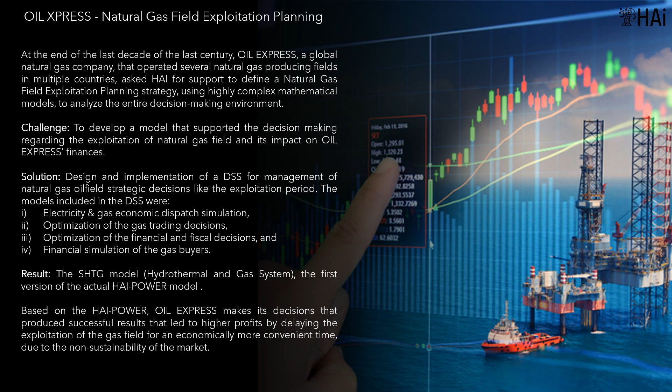Solution: design and implementation of a DSS for management of natural gas oil field strategic decisions, like the exploitation period.

The models included in the DSS were electricity and gas economic dispatch simulation, optimization of the gas trading decisions, optimization of the financial and fiscal decisions, and financial simulation of the gas buyers.

Result: the SHTG model, hydrothermal and gas system, the first version of the actual HAI-POWER model.

Based on the HAI-POWER, OIL EXPRESS makes its decisions that produced successful results, leading to higher profits by delaying the exploitation of the gas field for an economically more convenient time, due to the non-sustainability of the market.

HAI-POWER integrates the following models. HI Electricity Supply Chain Optimization supports decisions in the electricity supply chain, in terms of sectoral planning and business generation.

HI Smart Grids Optimization supports the decisions of the various agents involved in the smart grids business. HI Natural Gas Supply Chain Optimization supports the decisions of the actors involved in the natural gas supply chain, at the level of sectoral planning and business generation.

The following is the topology of HAI-POWER.

Hydraulic System Physical Modeling. HI Water corresponds to a general model that includes all kinds of hydraulic components: reservoirs, hydroelectric power plants, rivers, overflow channels, connection points and pumping stations, demands like irrigation, aqueducts, environmental, and industrial.

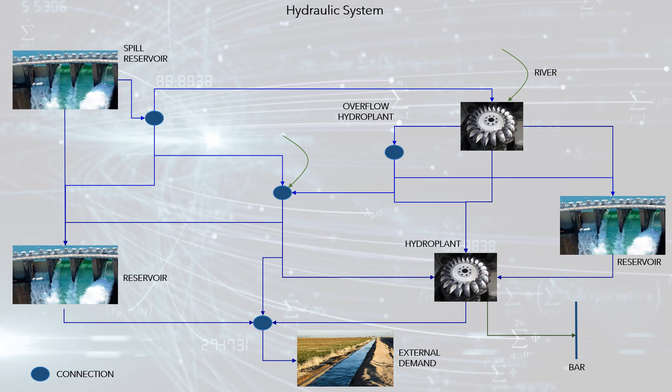Components can be freely linked to form any topology, like pumping storage systems. Hydroelectric power plants are modeled independently of reservoirs, so plant-reservoir connectivity must be established.

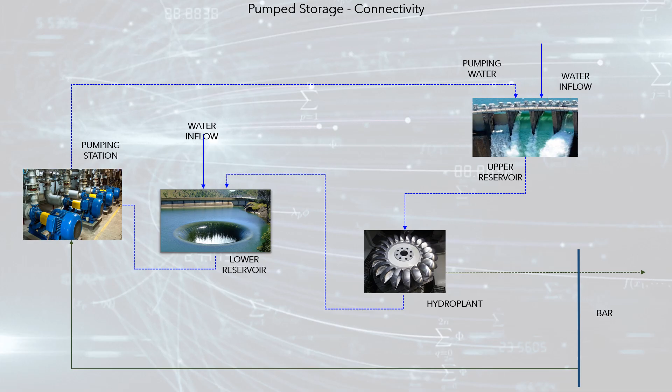The regulation capacity of the reservoir is simulated in detail, so such a simulation consistently represents the dispatch of the power plants, considering their ability to regulate the multi-annual, annual, hourly water resource.

Electric System Physical Modeling. Electrical connectivity is carried out through a network of circuits and bars that integrates different types of installations: power plants like hydroelectric, thermoelectric, coal, wind, solar, biomass, places of demand like industrial, cities, regional interconnections, and...

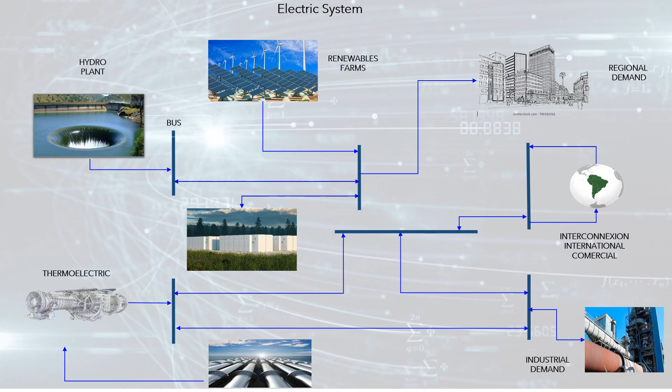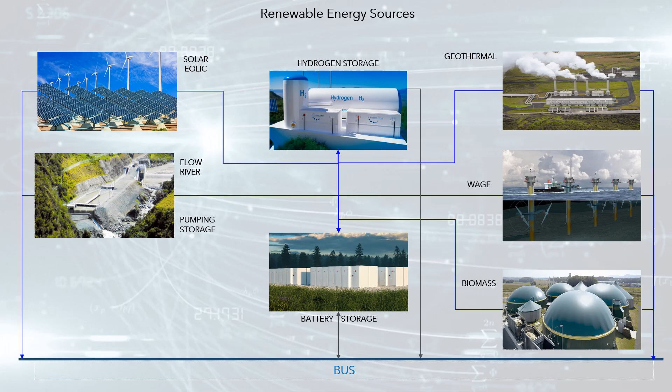energy storages. HAI-POWER includes the simulation of several types of renewable energy sources and energy storages. For each type of electrical asset, HAI-POWER includes the exact equations for simulation.

Natural Gas System Physical Modeling. HI Gas describes the process of supply and demand of natural gas. From this point of view, its integration with the electricity system determines the economic equilibrium of the electricity-gas markets.

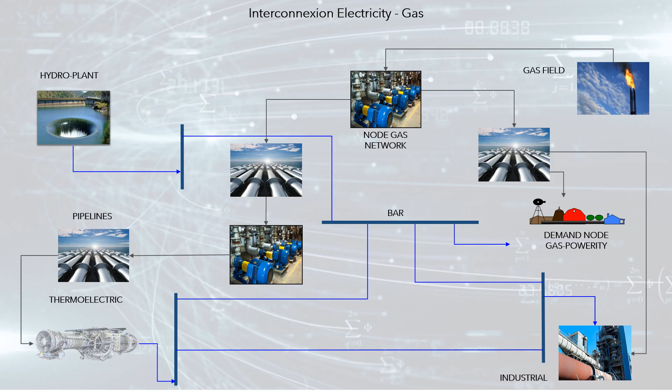The entities of the natural gas system are nodes, which connect the gas system installations; production fields; and consumption zones, discriminated by sector, example: refineries, heavy industries, residential, vehicular, and commercial thermoelectric power plants.

Transport systems: pipelines and multimodal transport systems using vehicles; pumping stations, which compress the gas to transport it; and ports, which receive and ship liquefied natural gas (LNG), and have gas storage capacity.

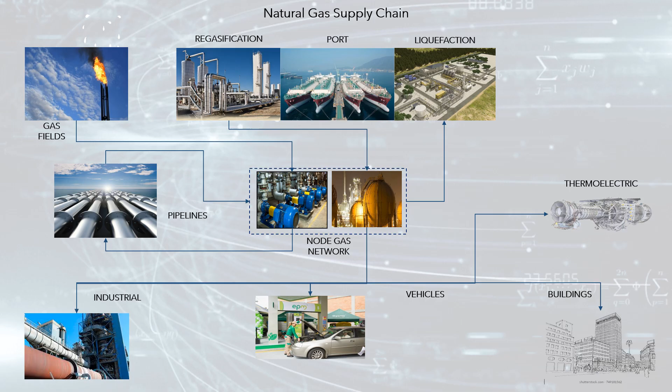Connectivity between the electricity and gas sectors occurs through the demand for natural gas for use in thermal plants, and the substitution of demand that can occur between gas and electricity.

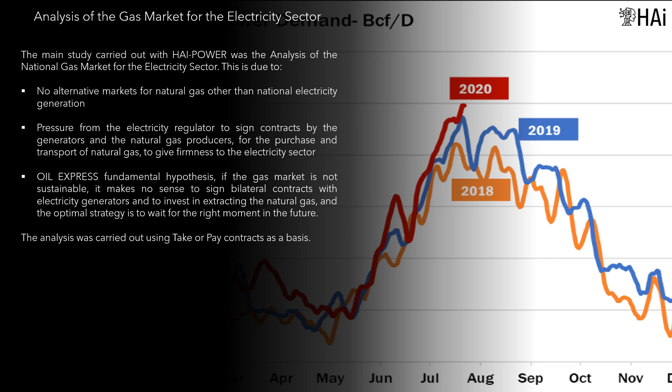Analysis of the gas market for the electricity sector. The main study carried out with HAI-POWER was the analysis of the national gas market for the electricity sector, due to no alternative markets for natural gas other than national electricity generation.

Pressure from the electricity regulator to sign contracts by generators and producers of natural gas for the purchase and transportation of natural gas, to give firmness to the electricity sector.

Oil Express fundamental hypothesis: if the gas market is not sustainable, it makes no sense to sign bilateral contracts with electricity generators and to invest in extracting the natural gas, and the optimal strategy is to wait for the right moment in the future. The analysis was carried out using take-or-pay contracts as a basis.

The take-or-pay (TOP) is a contractual clause, requiring the buyer to take delivery of a specific amount of goods or services from the seller or pay a fine if they do not. Thus, it protects the seller against potential losses if the buyer refuses to complete the purchase by a particular date.

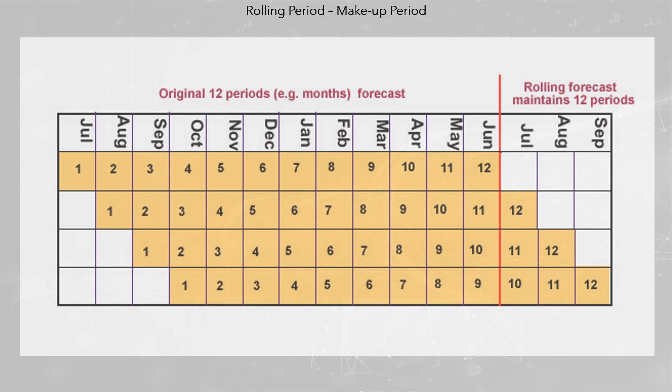Given the seasonality of prices in the electricity sector, the model included TOP with a rolling period, which gives flexibility to the buyer to accommodate their physical purchases. But it complicates the generator's decision-making process.

To stimulate the natural gas market for the electricity sector, government institutions conducted a reference study. This study was taken as a reference to analyze the market using the SHTG model.

The main characteristics of the study were: the rolling period was 6 months. 10 plants were considered for take-or-pay contracts with an installed capacity of 2,813 megawatts. The take-or-pay percentage was 30% for the plants of the center and 70% for the plants in the border, and the electricity dispatch planning model used by the ISO operator was adapted to represent the impact of TOPs.

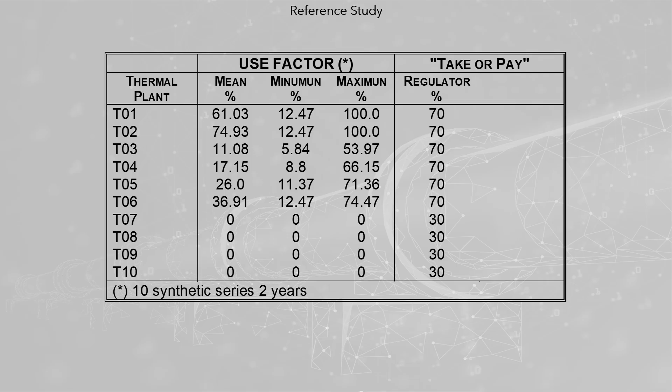The table presents the summary of the characteristics of the scenario studied by the regulator to stimulate the signing of contracts in the natural gas market. The percentages of TOPs fixed do not come from an optimization model, they were perceptions of what should be.

The chain of qualitative effects, which derive from TOP contracts, is relatively easy to foresee. The bid price of the thermal plants to the spot market will go down. This is because they have turned the variable cost into a sunk cost.

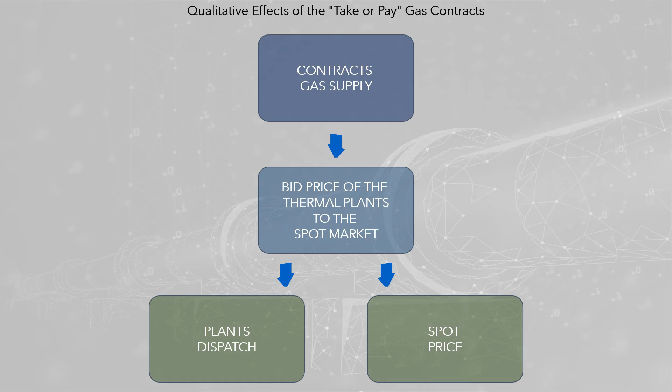In the extreme, it could reach zero. This will lead to an increase in the dispatch capacity of thermal plants, and the fall in spot prices. As the volume of natural gas contracted through TOPs increases, it can be expected that hydro plants will lose share, thermal plants will gain participation, and the spot price will go down.

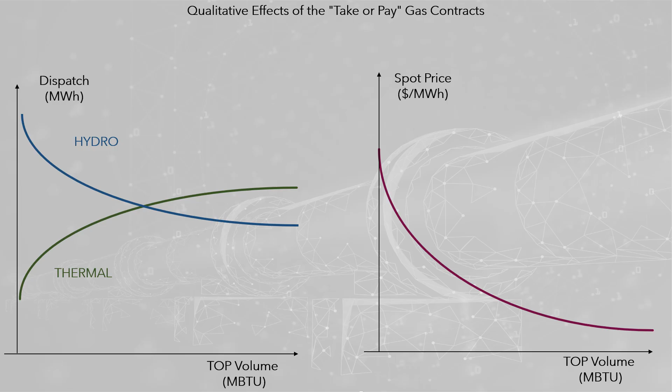It is clear an economical resource, but not 100% reliable - hydroelectric energy - is being exchanged for another, more expensive but more reliable - thermal energy. It should be considered as a risk premium.

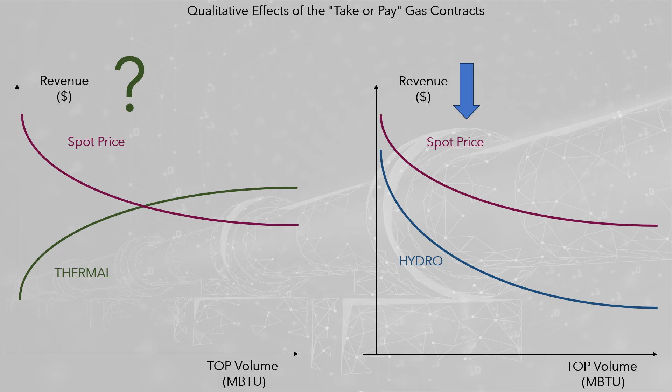From the point of view of income, revenues from hydro generators will decrease, and the change in the income of thermal generators cannot be evaluated a priori. Therefore, a mathematical model is required to evaluate quantitatively the natural gas market.

Modeling take-or-pay contracts. To carry out the study, 5 cases were implemented to consider the TOP modeling. The following is the code associated with the modeling and description.

No TOP, no contracts: Libre, optimized contract generation. Equations are included in the dispatch model, HAI-POWER, to accurately represent TOP contracts.

Rodante, minimum rolling generation: the minimum generation of the thermal plant is forced during the rolling period, to ensure compliance with the contract. Mensual, minimum monthly generation.

All forced generations can be implemented with an economical dispatch model, without requiring modifications to the model. All these imply losses for thermal plants when the marginal costs of electricity are below the variable cost of top.

Top contract modeling implies dividing the thermal generation in GT0, thermal generation with cost equal to variable OM costs excluding fuel cost, type 0, limited by top contract; and GT1, thermal generation with cost equal to variable OM costs plus fuel cost, type 1, non-top contract. GT, the total thermal generation, must be equal to GT0 plus GT1.

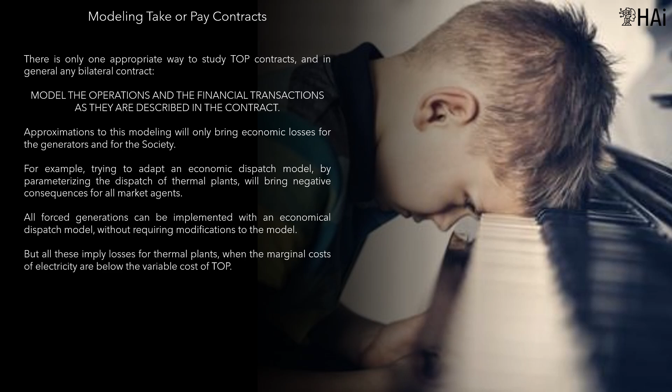Scenario aggregate economic results: following the logic, the most economical option is not to consider the top contracts. When including the top, a risk premium must be assumed, which could be established as the difference between optimized contract generation and no top contracts. In this case it implies 26% of cost overruns.

The last 3 cases involve overcosts due to the poor quality of mathematical modeling. As poor quality increases, cost overruns increase. It must be interpreted that if we implement low quality models, this will translate into more expensive operations, which will pay someone in the market.

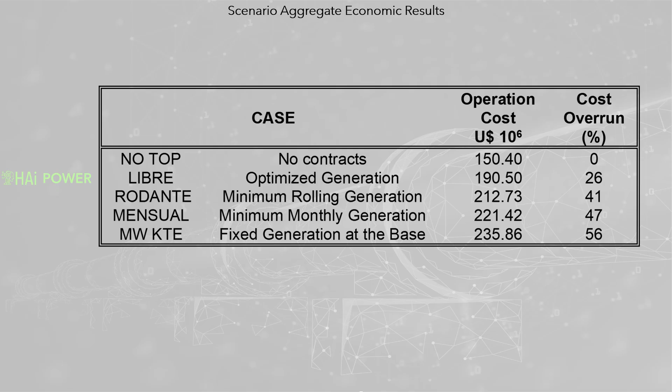Under economic rationality, thermal generation GT0 must be allocated in the blocks in which it substitutes more expensive energy, block B03. When it is assumed that the thermal generator will not generate at a loss despite the take or pay, the thermal generation decreases to the economic optimum level for the generator, conditional on it already having a top.

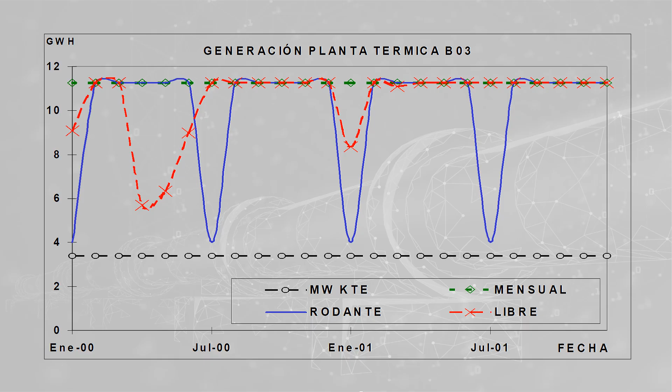In the bad modeling cases, the generator is forced to an additional loss to that caused by an inadequate top amount. Taking marginal cost as a proxy for the spot price of electricity, it can be stated it should be expected that the highest spot price will be for the market without top contracts.

From this level, the spot price of the market will go down. The graph presents the nodal marginal costs.

To quantify the financial impact of take or pay contracts, we can consider the estimated operating income for generators, defined as the marginal cost, a proxy of the spot price, multiplied by the generation. Since the spot price goes down due to the top, the highest value reference is the market with no contracts.

In this case, for simplicity, the post-optimization financial impact has been evaluated, using the resulting dual variables as a reference. However, it should be noted that HAi Power can solve an MPEC, mathematical problem with equilibrium constraints, in order to convert the financial impact into part of the optimization model, and thus obtain a more accurate view of the health of the market.

The effect for hydraulic generators, which generate less and receive less remuneration for each MWh generated, the negative effect is evident. For thermal generators with TOP, the increase in generation could produce a higher operating income.

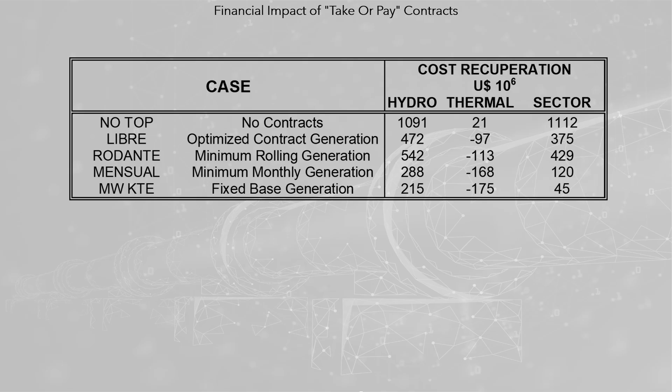The impact can be summarized as: TOP contracts as proposed adversely affect the aggregate of all generators, and when mathematical modeling practices are incipient, this will negatively affect the market. A good way to present the financial information is the accumulated curve of estimated operating income over the entire planning horizon.

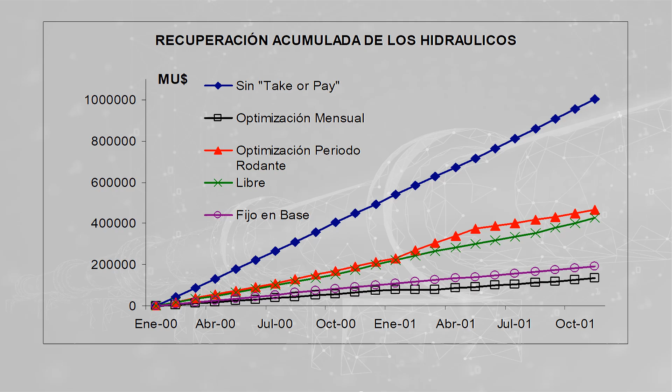The graph shows operating income of hydraulic generators. These graphs present the aggregation of all generators, but they exist for each individual generator.

In the case of this hydro generator, paradoxically its financial health does not depend on its own actions, but on those of other agents. If thermal generators assume a rational position, the financial health of the hydro generator will not be affected. But if they assume an irrational position, ignoring mathematical laws, the hydro generator can go bankrupt.

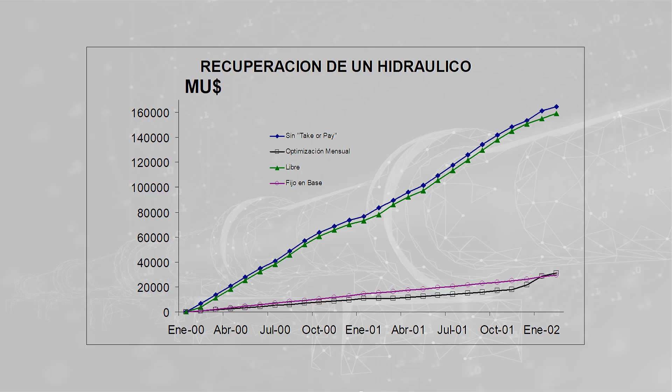In simple terms, this defines an undesirable externality in a market, in which the errors of an agent can be paid by other agents. The golden rule is everyone pays for its own mistakes and takes advantage of their right decisions. The situation of thermal generators is different.

For the planning period analyzed, the costs of TOP contracts cannot be recovered. The financial damage will be greater if the decision handling is not based on specialized mathematical management models. The graph indicates a general crisis of the thermal generators if the TOPs indicated by the government are signed.

HAi Power allows Oil Express to financially analyze all market participants, both potential customers and clients of the competitors, which allows Oil Express to perform scientific market intelligence activities.

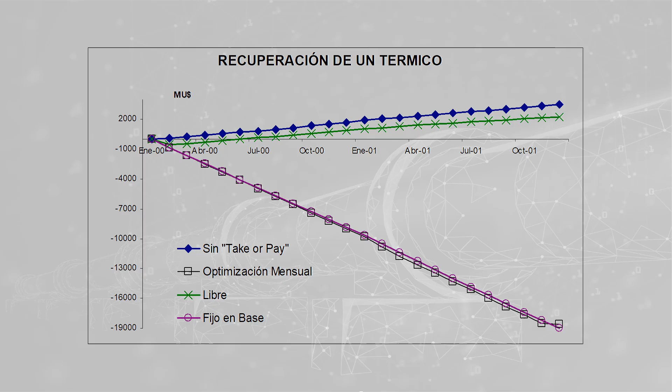These adjusted values do not come from an optimization process. However, it should be noted that the High Power model can be used to determine optimal TOP values.

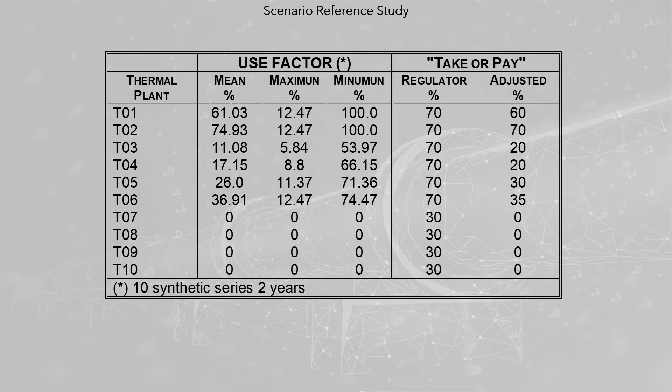It could be concluded that the greatest damage that can be done to the market is to establish reference values without justified mathematical support, since there are values of the TOPs that minimize the values of the risk premiums for reliability, without profoundly altering the economic behavior of the market.

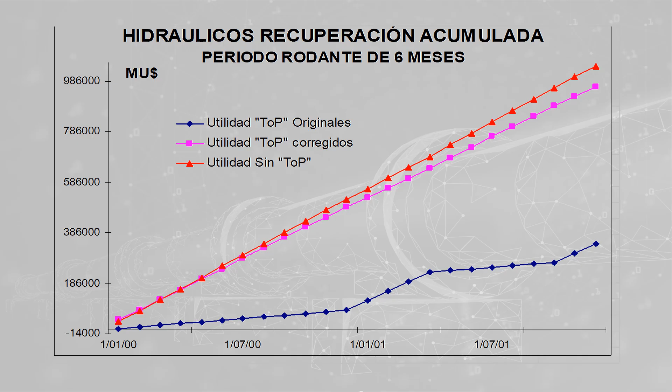It is coherent that if the thermal generators act rationally, they do not drastically affect the hydraulic generators as a consequence of their bad decisions.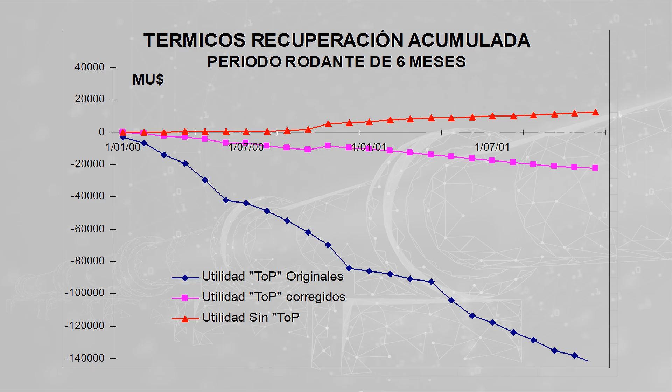In the case of cost recovery of thermal generators, the situation is more complicated, including because the optimal values for the TOPs will generate problems of bankruptcy and liquidity, which will be more serious if the TOP values do not have an appropriate rationality. This indicates that the electricity market cannot guarantee that thermal generators can pay the TOP contracts that are theoretically required by the government.

Successful decisions: For its part, Oil Express has proven that there are no market conditions, that is, there does not exist a good set of profitable thermal generators that can pay for gas through TOP contracts, required to guarantee the extraction of natural gas. If it is a question of compensating the situation based on price, if Oil Express sells natural gas at high prices...

It is possible that Oil Express must recover bankrupt industrial company assets. Everything seems to indicate that the optimal decision may be to delay the investment, waiting for a market with better conditions. Use case: surveillance of the electricity and natural gas sector.

A supervisor of the electricity and natural gas sectors hired HAI to solve the following problem. Challenge: to develop a decision support system, DSS, for surveillance activities for the electricity and natural gas sectors.

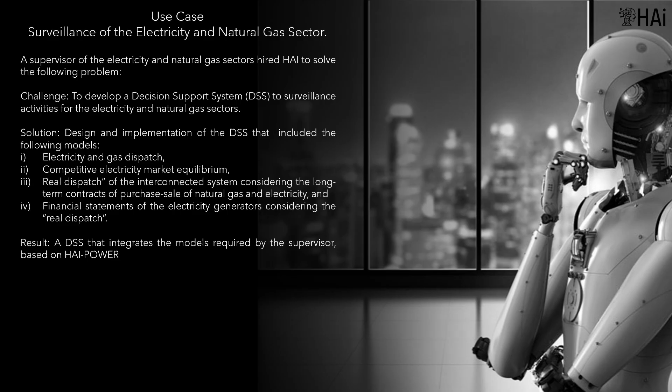Solution: design and implementation of the DSS that included the following models: electricity and gas dispatch, competitive electricity market equilibrium, real dispatch of the interconnected system considering the long-term contracts of purchase-sale of natural gas and electricity, and financial statements of the electricity generators considering the real dispatch. Result: a DSS that integrates the models required by the supervisor, based on HAI-POWER.

Like Herbert Simon, Hypothalamus Artificial Intelligence believes that computer-based mathematical modeling is the greatest invention of all times. Thank you for your attention.